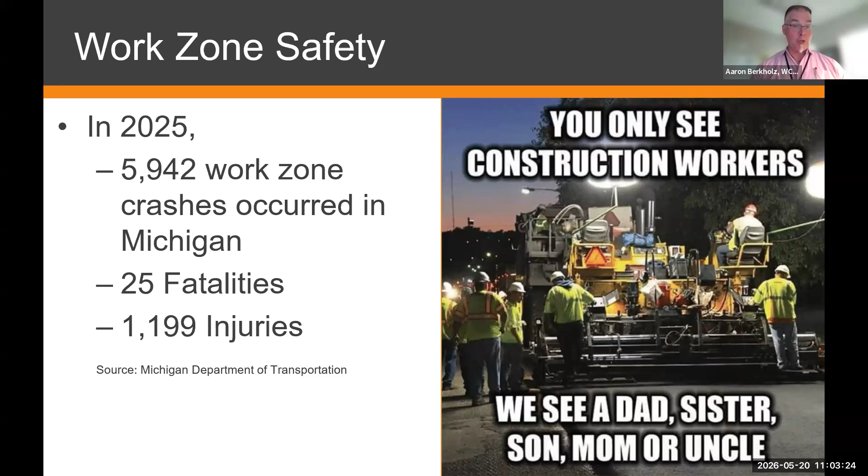Next slide. Here we've highlighted one of the road commission employees that I'm very blessed to work with. I would be heartbroken if anyone here, one of my colleagues, would be injured or, heaven forbid, killed while out in the line of duty performing their daily work.

I myself drive through work zones, not just during my daily work, but also in my personal travels. It can be quite frustrating when you're in a hurry to get somewhere, but we ask that everyone slow down and minimize all those distractions that we all have in our vehicles now.

Not only do we have smartphones now, but they're putting screens in the vehicles. So we ask that those distractions be set aside, that everyone employ some patience and remain calm, because for the most part, these construction projects are a relative short-term inconvenience for a long-term improvement. We appreciate everyone being attentive to work zone safety.

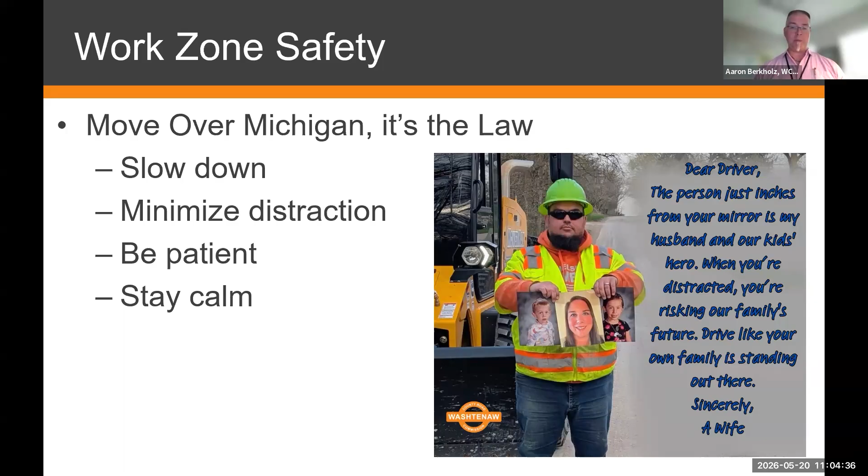Okay, thanks, Aaron. Yeah, and thanks again for meeting with us virtually. So first, we'll get started as we talk about our construction kickoff. A little bit about ourselves: we're responsible for over...

1,650 miles of county road. Over 700 miles of that are unpaved. We also manage 126 bridges and over 2,900 culverts, as well as over 36,000 signs throughout the county.

We're a contract agency for MDOT, so we maintain almost 600 miles of MDOT route. You can tell that's an MDOT route versus our jurisdiction because every numbered road within the county is under MDOT's jurisdiction, such as US 23, I-94, M14, or M17. Some of these have local names, like US 12 has Michigan Ave, or M17 has Washtenaw Ave.

So now we'll go into how projects are selected. We always like to start this way. You can go to the next slide, Tiffany.

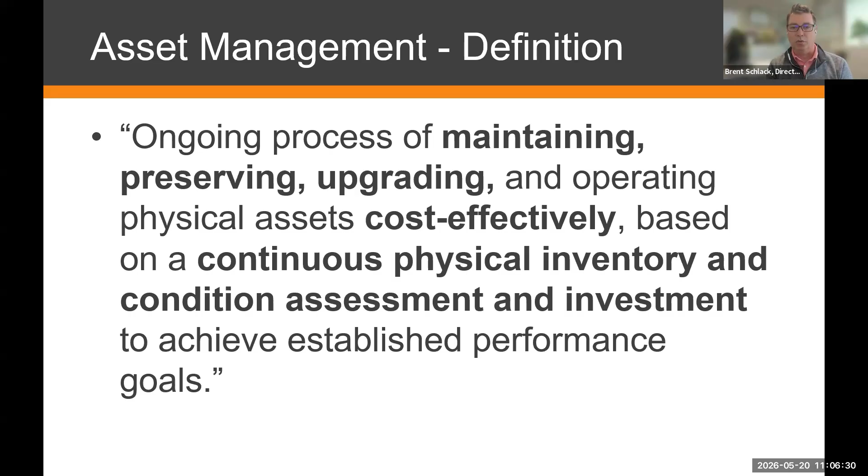We always like to start with a definition. We follow asset management practices here in Washtenaw County, which is the ongoing process of maintaining, preserving, upgrading, and operating physical assets cost effectively based on a continuous physical inventory and condition assessment and investment to achieve established performance goals. That's a mouthful.

But basically what we do is we rate all of our primary road system on an annual basis and our local paved road system every other year. So our strategy focuses on preventative maintenance, using that rating system to find the right fix at the right time in the right place. Our goal is to extend the service life of all of our roadways.

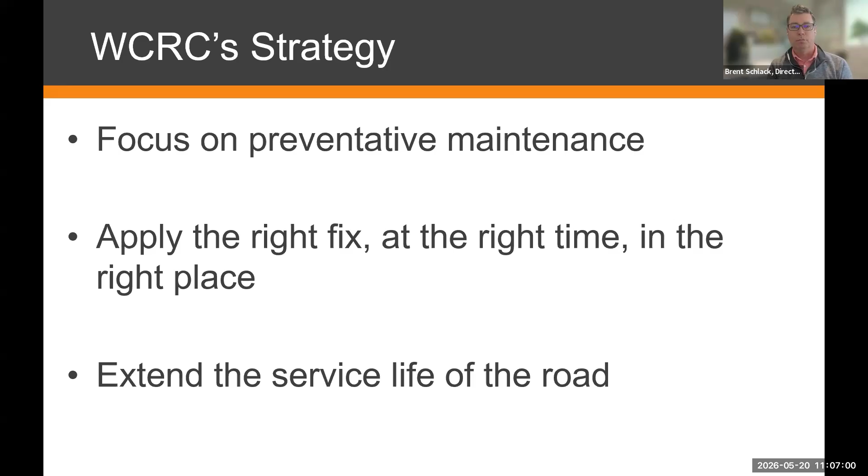We always like to use the example of maintaining your vehicle. If you regularly change the oil, that helps extend the service life of that engine, or if you rotate your tires, it extends the service life of those tires. Same thing applies to our roadway system. If we apply preventative maintenance strategies to our roadways, it extends the service life. So whenever we're looking at a chip seal road, performing crack seal, or a mill and overlay, we're using those preventative maintenance strategies to extend that service life.

So now I'll turn it back over to Aaron, and he can go through our projects.

Thanks, Brent. We've got a wide variety of project scopes that we're going to undertake for this construction season. Some construction has already started. An example would be we've been working with a contractor on the construction of a roundabout in Ypsilanti Township at the intersection of Whittaker Road and Martz Road. That actually started in the middle of March, and that's the exception and not the rule.

Generally, road construction isn't going to start until a little bit later than that, mid-April. But the contractor was very much driven to want to get started on that project, and we were not going to prevent that. We appreciated that they wanted to get started, and we're actually getting closer to wrapping that up. So that's one project that has already started.

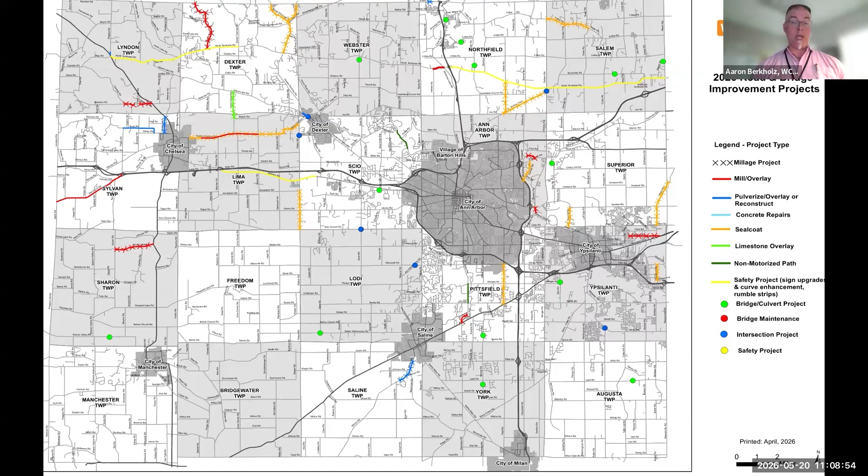We've already started some asphalt paving work up in Dexter Township on Hankerd Road. That work is ongoing, and the construction season has started with a bang. That will continue to ramp up.

We undertake a variety of types of construction during the season. Generally, that season runs from the middle of April, depending on how the spring is, through the end of October or maybe the middle of November. And then we start to run out of weather.

So we undertake preservation, which would be more in line with our annual chip seal or seal coat program. We undertake resurfacing, asphalt resurfacing, where we go out and mill and resurface our asphalt roads. We also resurface unpaved roads, and Adam's going to talk about that later. We get into reconstruction, where we do a full reconstruction of a road, and that's where we can crush the road up, providing a modified base material for new asphalt to be placed on, or it can be an even larger scope where we completely start over on a road.

We're certainly working on some bridges this year. Brent mentioned earlier the number of bridges we have countywide and the number of culverts. And then we undertake safety projects, things like roundabouts, signalizing intersections, those fall into that safety category. Also constructing centerline corrugations along roads to promote safety and reduce lane departures, because that's a reason we have very serious crashes, when a motorist leaves their assigned lane.

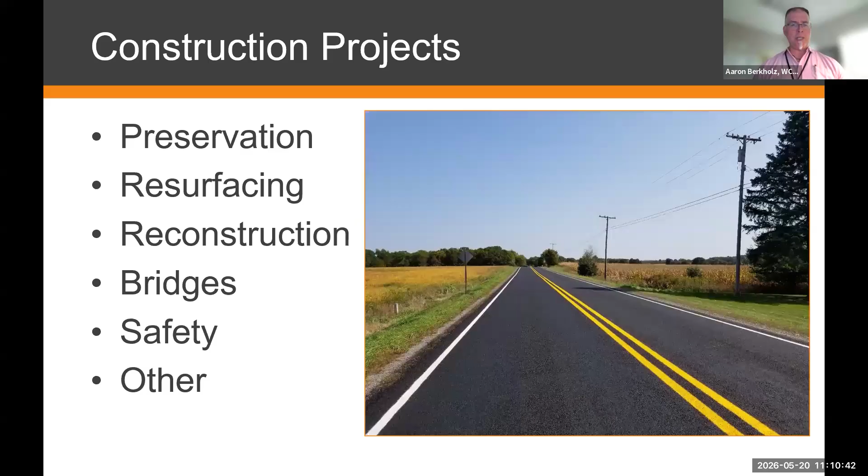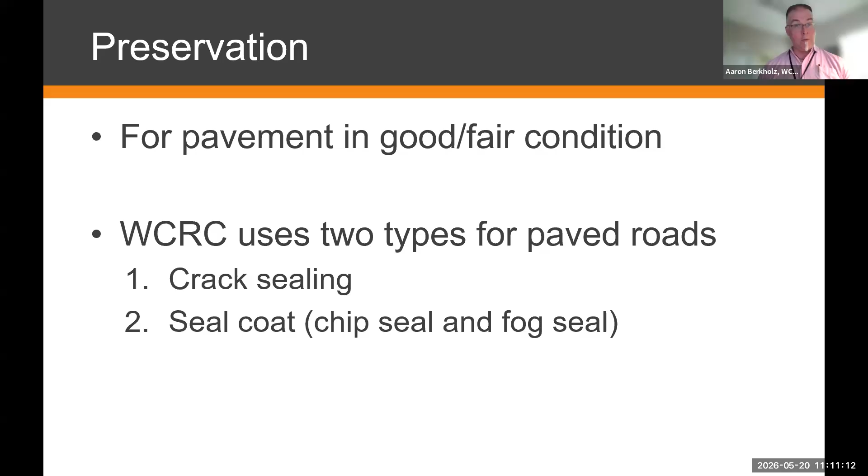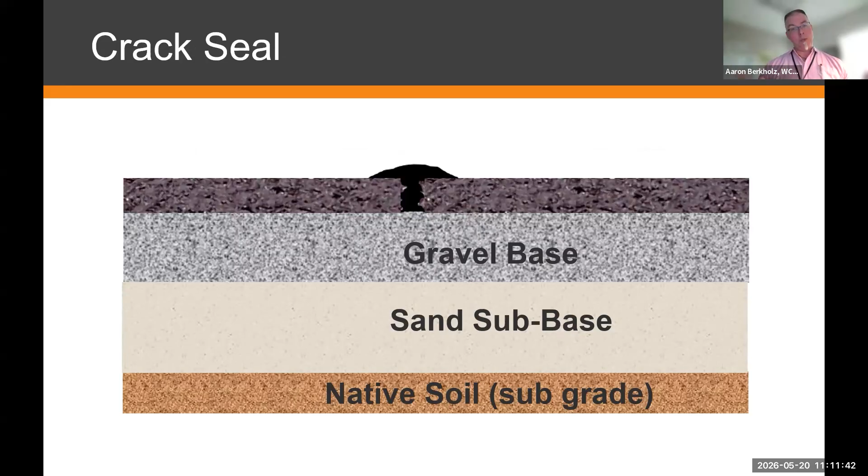You can see that you've got a crack in that asphalt surface, that top surface there. By sealing that crack, we keep water from infiltrating into those underlying layers of the road, because particularly with asphalt pavement, it's a flexible pavement. When water infiltrates that, it can have some pretty severe consequences, and ultimately, that's where our potholes come from.

This is an example of our seal coat. We undertake a robust program each year, credit to our operations department, because we actually perform this work directly. We apply what's called an emulsion, commonly referred to as tar and stone, where the adhesive, a black liquid, is applied to the surface of the road, and then small stones are put down on top of that.

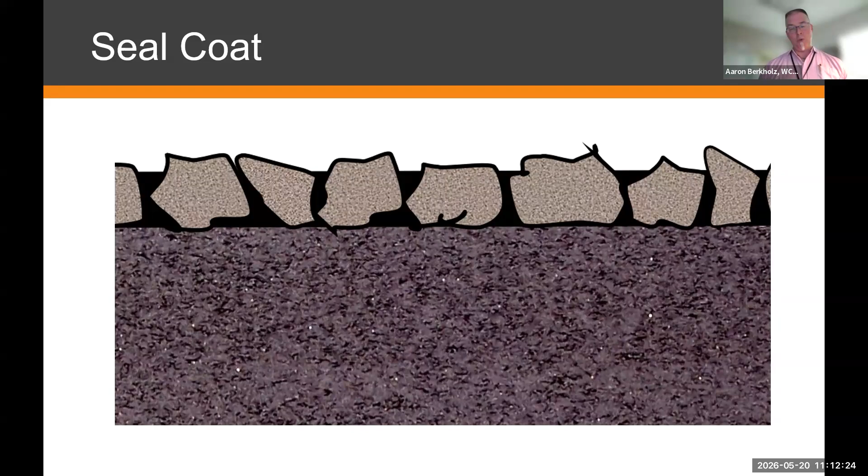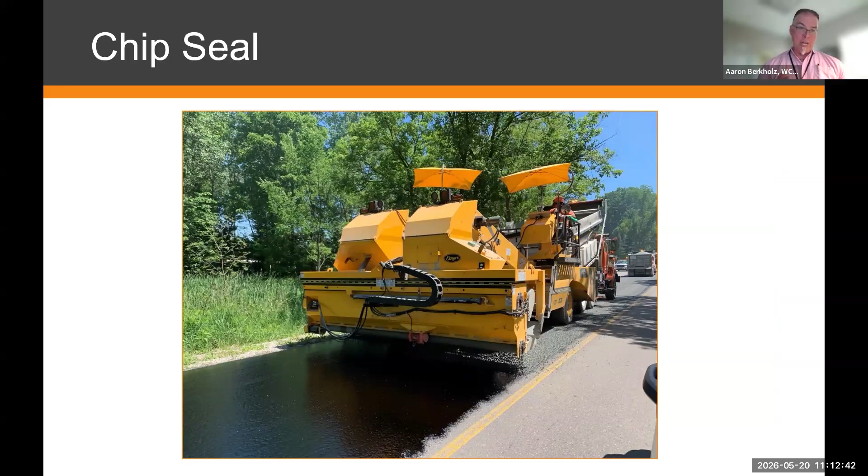That's the seal coat. Next, this is an example of that chip seal process, with the road commission performing this with direct force. We've got the truck - you can see it's actually going backwards, which is kind of a neat aspect of chip seal. We have a tanker go through that applies the black liquid, and then the chip spreader comes behind the tanker and puts the stones down. Then we roll those stones into place to really get good adherence between the small stones and the emulsion applied to the road.

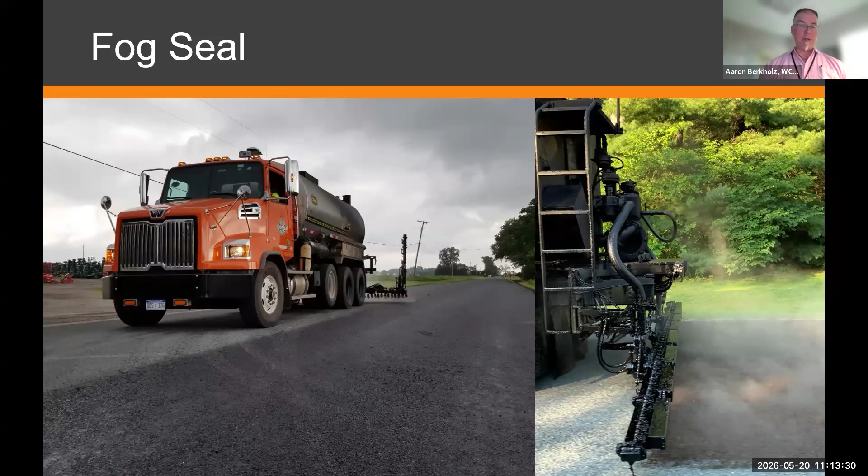What that does is like applying sunscreen to your skin. It protects that asphalt from deterioration due to ultraviolet effects, and it also seals small cracks in that asphalt surface. So again, we're trying to extend and promote the longevity of that good or fair asphalt surface.

It's important that when we are out doing chip seal and fog seal, that you follow the directions given by the flaggers on site. We oftentimes will employ a pilot car so people know what route to take. We try to maintain traffic when chip sealing a road, but it's very important that people follow the directions given, including a pilot car, so they promote their safety, the safety of the workers, and avoid damage to their vehicles.

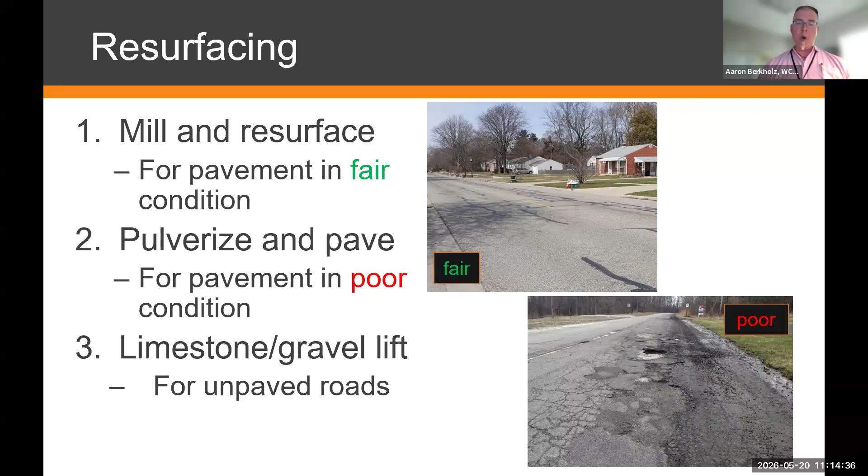The next type of construction project we typically undertake on our county roads would be resurfacing. Depending on the condition of the paved county road, we will perform a mill and resurface - that's for pavement in fair condition. As the road continues to deteriorate into poor condition, we look more at a pulverize and pave, where we're crushing that existing road and blending that crushed asphalt material with the underlying material to provide a modified base that we then overlay.

This is an example of an asphalt overlay, a mill and fill - you can see the milled surface in the foreground, and the asphalt paving in the background. That's where you remove about 2 inches of the asphalt surface, for a road that's in fair condition. I know that road was in fair condition because you can see that milled surface has got a couple of cracks in it, but overall it's in very good condition.

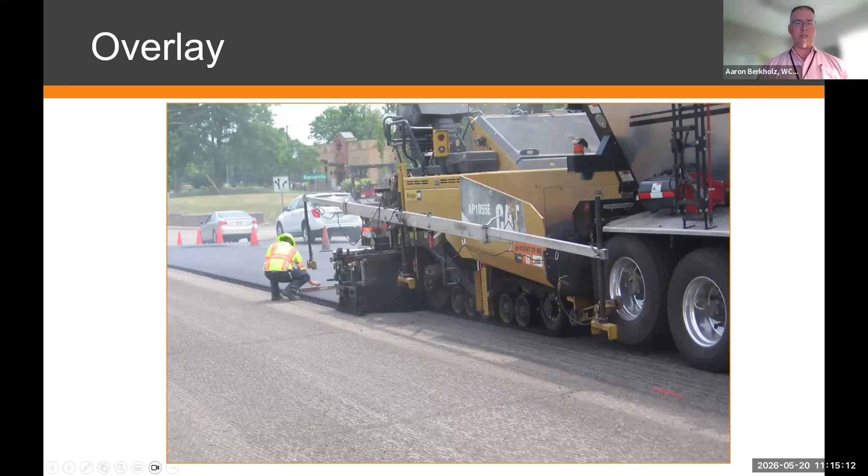For our unpaved roads - as many of you probably know, we have many hundreds of miles of unpaved county road here in Washtenaw County, and that can be a challenge to maintain and improve. But the way we improve them is by improving the drainage, which is crucial to promoting the longevity of roads, particularly unpaved ones. We put down aggregate resurfacing - in some parts of the county we use limestone material, and in other parts more of a gravel material. We refer to that commonly as a limestone lift or a gravel lift, where you're putting down new material so we can effectively maintain it.

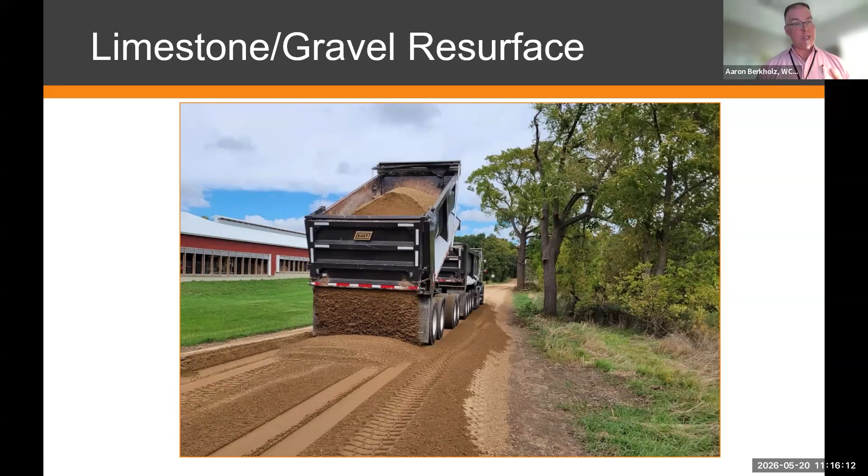We try to refer to them as unpaved roads and not dirt roads, because once a road degrades to the point where it's a dirt road, it's very difficult to maintain. You can't maintain dirt.

You have to have good aggregate, good limestone, or good gravel to effectively maintain that unpaved road.

For this upcoming season, it's quite a robust program. We are going to asphalt resurface nearly 20 miles of road this year. We currently have about 1.5 miles of unpaved road improvements, resurfacing those unpaved roads with limestone and gravel, and then we're going to do 26 miles of chip seal, which I talked about earlier.

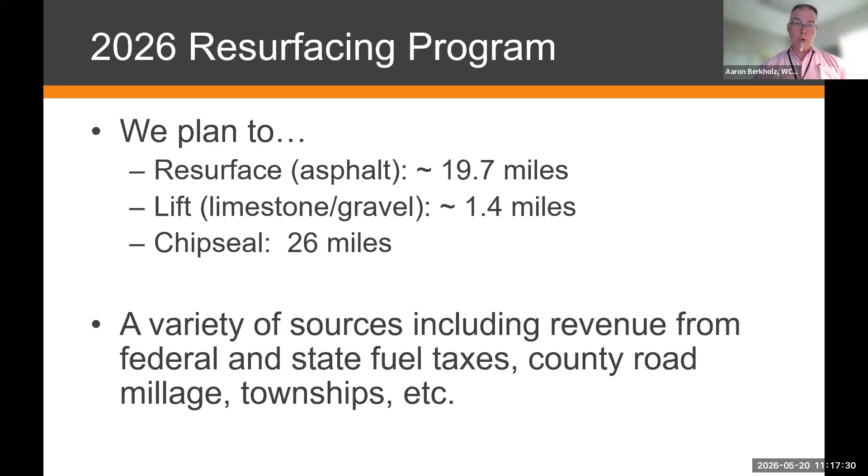The way that we budget for this is through a variety of sources, including federal and state fuel taxes, our countywide road millage, which we're so thankful to the voters of Washtenaw County for continuing to support to help us improve and maintain our roads, and the townships. The townships are a great partner with us. We offer an annual matching program to each of our 20 townships, and their partnership is essential for us to be able to improve and maintain our local county roads.

So getting into some of the specifics, these are our asphalt resurfacing projects. You can see the list here. I'll just go through quickly.

8 Mile Road up near Whitmore Lake, that one is the border between Washtenaw County, that's Northfield Township, and Livingston County to the north. We've partnered with Livingston County because they intended to work on their portion of 8 Mile Road as well as us, so we're collaborating with them, and we're going to work on that portion west of US 23 that's in quite an advanced state of deterioration, going west of Lemon Road.

We've also got Bush Road in Sylvan Township. That one is still part of a road improvement agreement with Consumers. You may recall Consumers did a pipeline project a couple of years ago. As part of the road impacts that they had, we were able to reach an agreement with them, and they've funded various improvements, including Bush Road in Sylvan Township. That'll be a pulverize and pave.

We've got Dixboro Road. This one is quite a challenge because of the nature of this intersection, Dixboro at Geddes in Ann Arbor Township. The mill and resurface is going to extend from the big bridge that goes over the Huron River south of Geddes Road, and it's going to extend up to and through the intersection at Geddes and Dixboro. Again, it's multiple lanes, a lot of traffic, so that one's going to be a real challenge based on the number of lanes and the traffic, but we're going to resurface that because it really needs it.

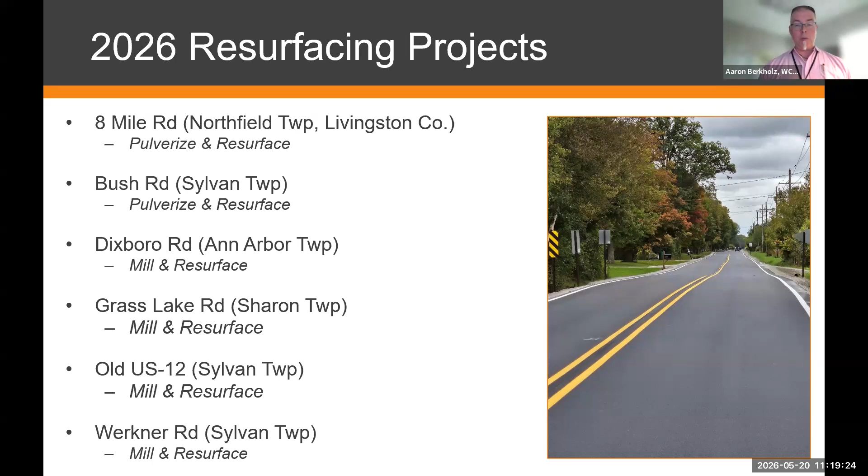We're also going to work on Grass Lake Road. We're going to work on Old US 12 out in Sylvan Township. We're going to be working on Werkner Road in Sylvan Township.

We're going to be in Holmes Road in Ypsilanti Township, that's a mill and resurface between Ford Boulevard and Michigan Avenue. We're going to work on Macon Road, that's another crush and shape.

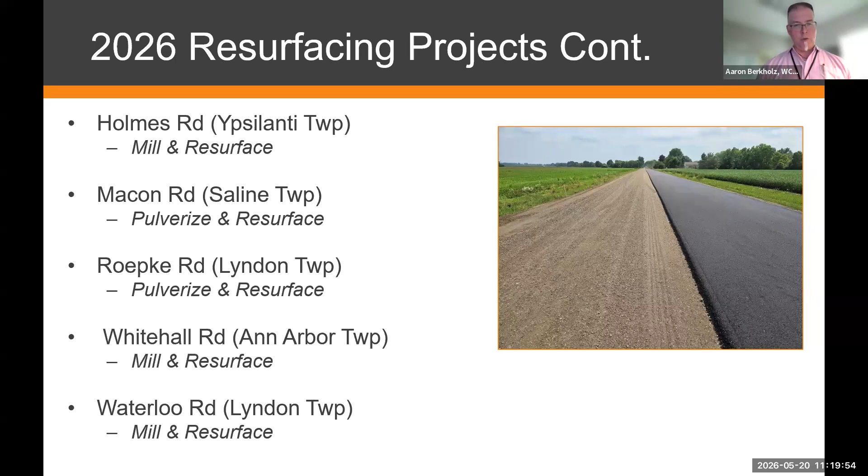We're going to work on Roepke Road in Lyndon Township. We're going to work on Whitehall Road, again near Father Gabriel Richard High School in Ann Arbor Township, doing a mill and resurface there. And then Waterloo Road in Lyndon Township, we've got some mill and resurface work to do there.

Cherry Hill Road. So we talked a little bit about bridges. Brent noted that we've got 126 bridges countywide that the Washtenaw County Road Commission is responsible for, that we own. One of them is Cherry Hill Road.

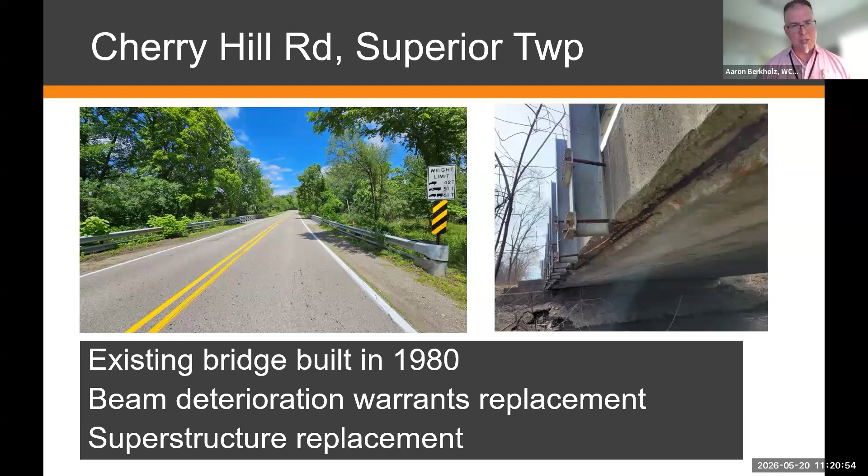The contractor started this work last week. They had to close the road to do it. This is in proximity to the hamlet of Dixboro, or the Huron Valley Humane Society over in Superior Township. So that road will be closed. It is closed, and it'll remain closed until the work is complete.

We've also got Main Street in Whitmore Lake. We have to specify which Main Street, because there's Main Street in Dexter, and there's also Main Street in Whitmore Lake.

Up in Whitmore Lake, the existing bridge—it's a bit of a dated reference—is just north of the old Whitmore Lake High School. That shows my age, since the new Whitmore Lake High School has been out on Whitmore Lake Road for a while now. But that gives a sense of where this bridge is located.

The existing bridge owes nothing to any of us. It was built in 1920 and is basically at the end of its service life. So this will be a full bridge replacement, expected to close in late June, with work continuing thereafter. It's quite an extensive job because we're replacing the bridge in its entirety there on Main Street.

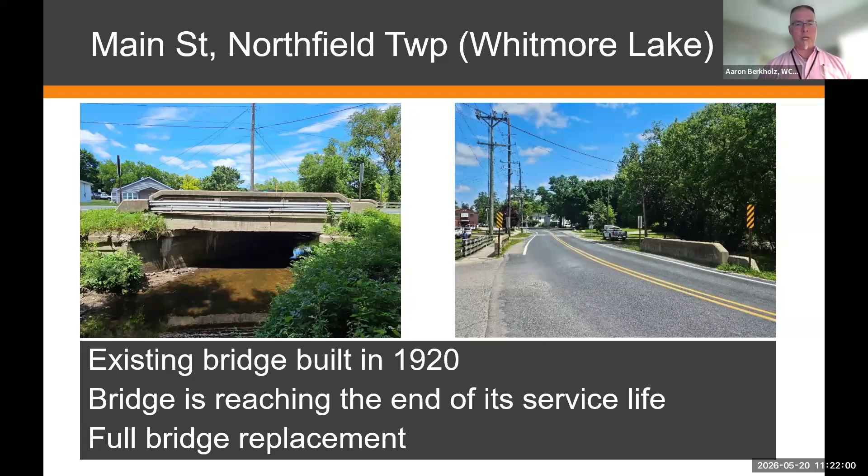Sharon Valley Road is our third bridge project for this year, down in Manchester Township, on an unpaved local county road. The existing bridge was built in 1960. It suffers from deterioration—it's in poor structural condition, has a 20-ton weight limit, and is also functionally obsolete. The alignment of this road is very poor. As a vehicle approaches from either direction, that motorist or piece of farm equipment has to navigate some very tight turns, and there's a lot of vertical grade change, since it's at the bottom of two significant hills, because that's where the River Raisin is.

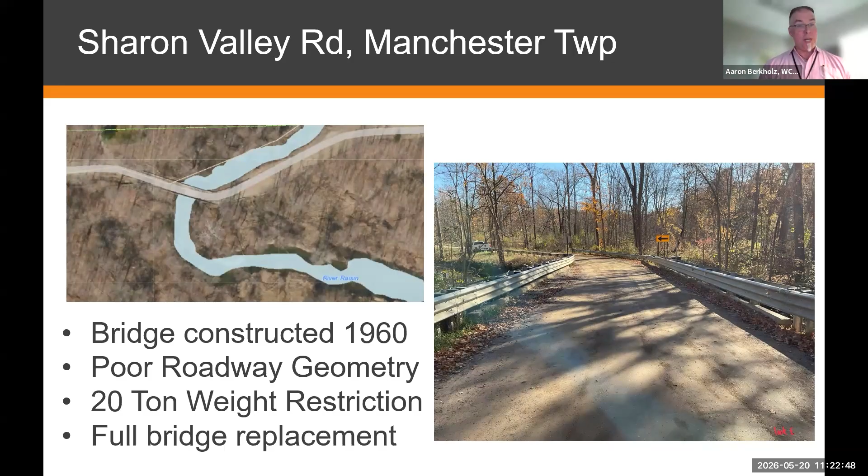All three of the bridges I've discussed include federal aid funds, so their design has to meet federal and state design requirements. Part of that is building a bridge of sufficient span to promote good movement of the stream through it—we call that hydraulic design. We also have to provide an improved alignment for the motorists navigating that area.

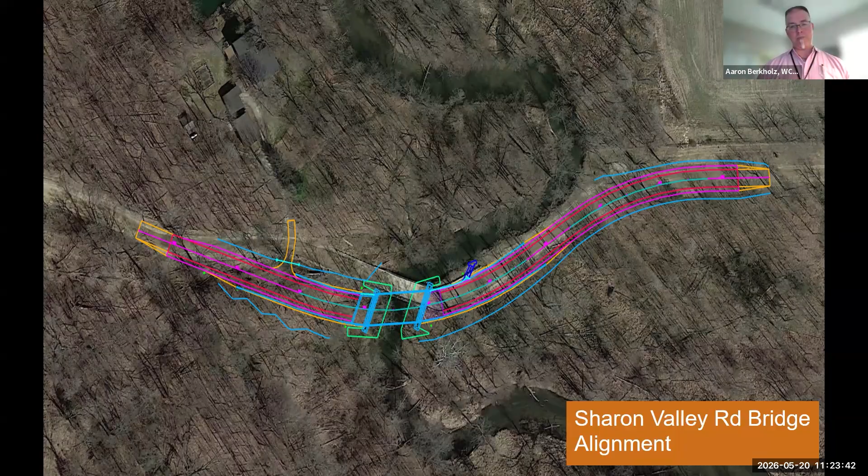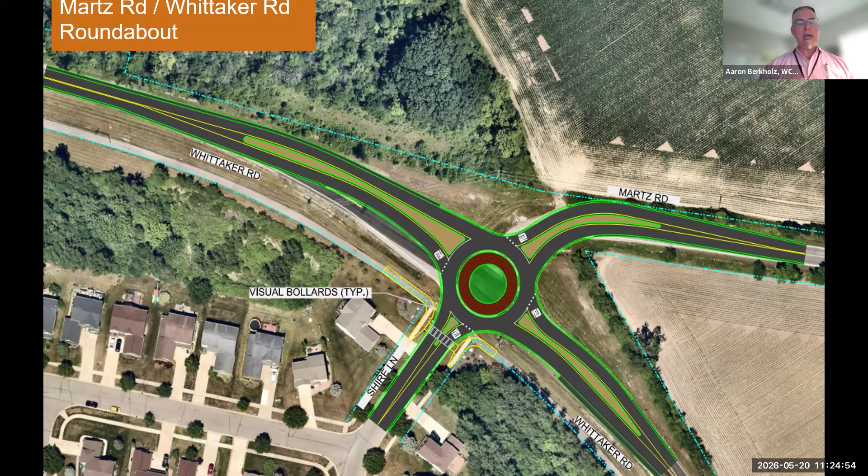It also improves safety. We talk about safety a lot with roundabouts, because one of the most severe crashes we have countywide is a T-bone crash at a traditional four-way stop intersection—somebody runs a stop sign or a red light and broadsides a vehicle coming through. Roundabouts really take that away, because everyone enters at a slower rate of speed, and there's no center of the intersection for traffic to collide in. Everyone is going around the circle at an angle.

Next slide. Here's one of our other roundabouts. This construction has already started as well—it started earlier this month, back in early May.

This has a significant traffic impact, and we did not overlook that in deciding to pursue this project and close the road to do so. This is at the intersection of Dexter-Chelsea Road and Main Street, just outside the limits of the city of Dexter, and we collaborated with the city of Dexter on this overall project.

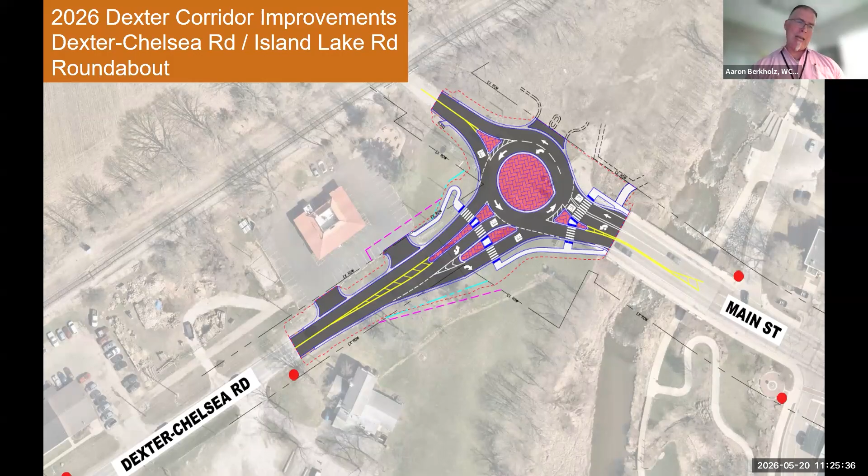The roundabout is kind of the highlight of the project, but overall it includes other aspects. Here we've got the roundabout, and further west at the intersection of Island Lake and Dexter-Pinckney Road, we're not building a roundabout, but making an improvement to add a right turn pocket for traffic coming away from the city, heading westbound, because we get really heavy afternoon traffic from people traveling through Dexter and out towards Pinckney. There's currently no dedicated right turn pocket there.

Motorists have essentially created their own type of right turn pocket by driving on the shoulder to get around stopped traffic going through the intersection on Island Lake Road. So we're going to include that right turn pocket and put up a new signal, which will improve the efficiency and movement of traffic at this intersection. Next slide.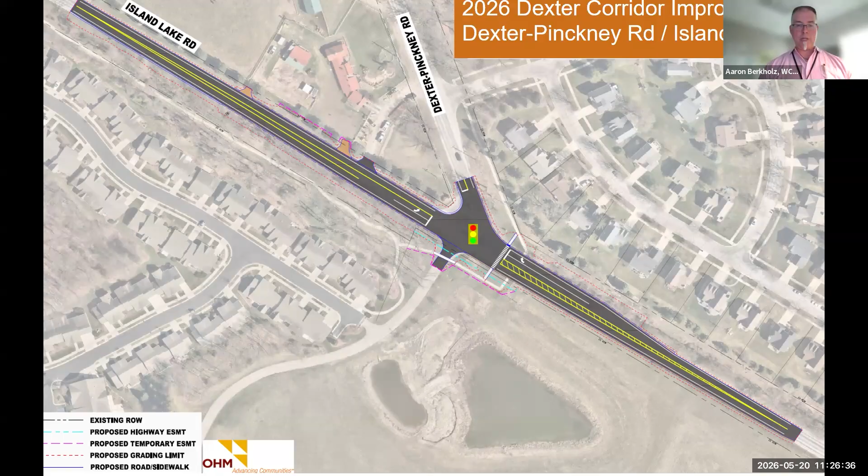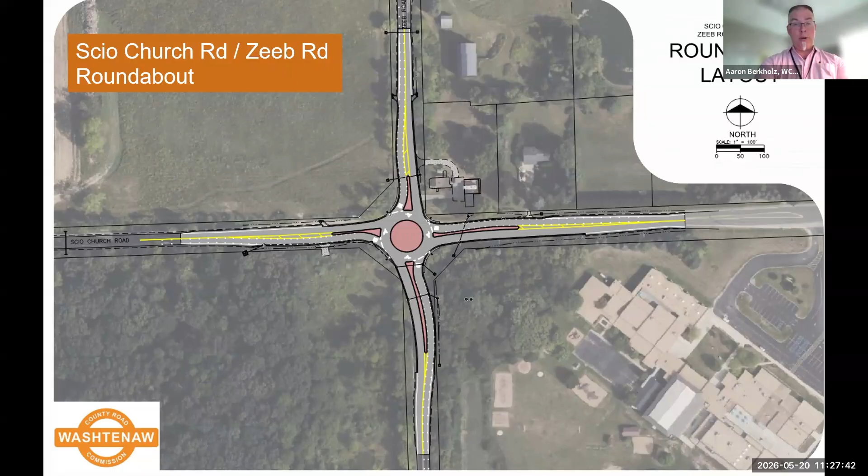The work is expected to start in the middle of June and be completed before school goes back. You can see Emerson School there in the lower right-hand corner of that picture. Again, we've been in contact with Emerson School, and so with the proximity of this project to the school, being immediately proximity-wise, we have worked around the school year to try to get this roundabout construction completed when the kids are out for summer.

Next slide. And here's the 4th of the roundabouts. This one is up in Salem and Northfield Township, up in the northeast corner of the county. And this is at Dixboro Road and Pontiac Trail. We have another roundabout just up the street from here at North Territorial and Pontiac Trail. We built that a few years ago.

This intersection, again, what's going to be of great benefit here is efficiently moving traffic. There's a great movement of traffic during the AM and the PM, those peak hours when people are going to and from work. In particular, people that live up in the South Lyon area but work in Ann Arbor utilize Pontiac Trail. So we see some really high volumes during those peak hours.

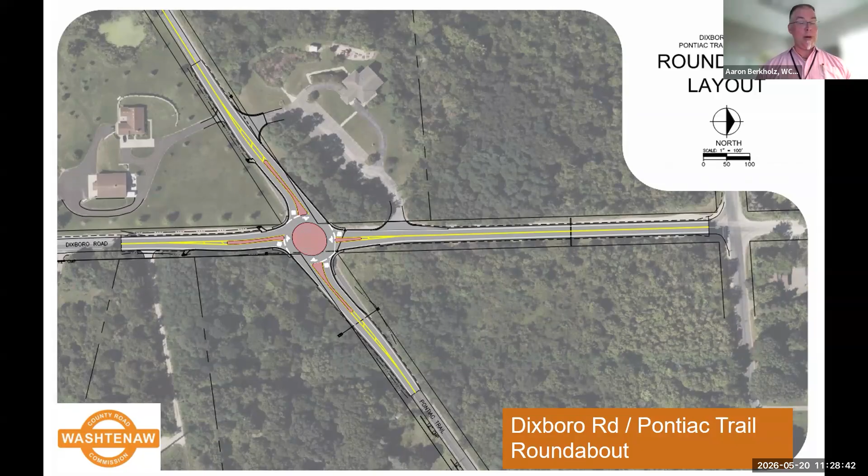And again, a roundabout promotes that continuous movement of traffic. You can really get a lot of traffic through a roundabout without people having to stop. Next slide.

So the road commission, I talked about bridges, and Brent touched on this earlier. We have an abundance of culverts. We own more than 2,900 culverts throughout the county. These are not bridges. Basically, the way that we differentiate between a bridge and a culvert is the size of the structure. So a lot of culverts are round structures, pipes that go under the road, similar to a bridge. And the idea is they're conveying either a stream or stormwater.

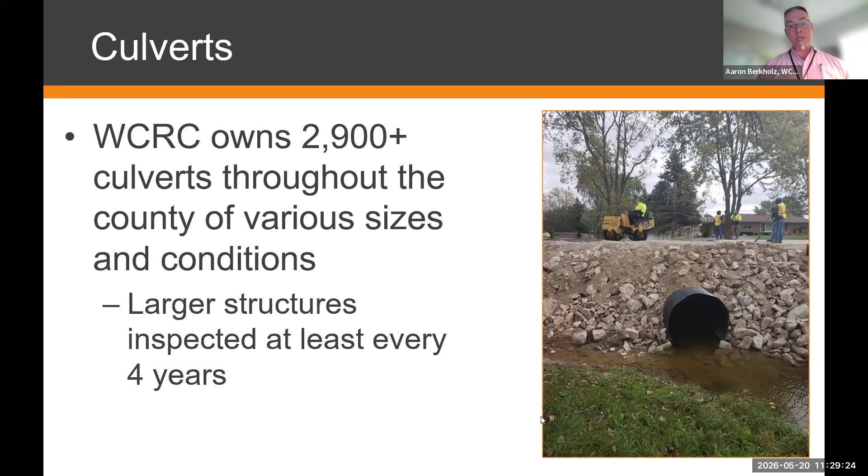And so we have a number of these that need to be replaced. We do have an annual program to inspect not only our bridges, but we also inspect our culverts on an ongoing basis. And here's an extensive list of culverts.

I do want to note here that what's been of great help in us replacing local county road culverts, and all the roads listed here are local county roads, has been the great partnership we've had with our townships and with the Water Resources Commission. Water Resources has administered a program called the Stormwater Grant Program, and so the townships have been able to realize an outside source of funding to help them partner with us to replace these types of structures.

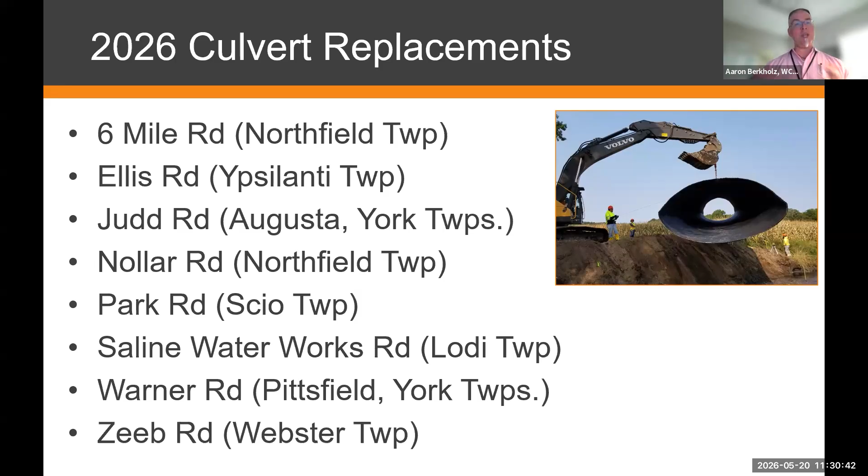And these structures get quite large. Even though they're not bridges, they still can be in the realm of, I'll say, 10 to 15 and almost up to 20 feet. So again, a great partnership with the townships and with the Water Resources Commission to realize all the work that's listed here. One thing with culverts is we close the road. When we do the work on a culvert, we close the road. That promotes the efficiency of the work and also everyone's safety, the safety of the motorist and the safety of the crew out there doing the culvert replacement.

Now we'll talk a little bit about traffic and safety. And again, within the engineering department here at the Road Commission, we have 3 sections: the permits section, the construction and design section, and the traffic and safety section. And so one of the aspects of our work that the traffic and safety section oversees is our traffic signals.

This would be new signals, upgraded signals, and flashing beacons. Flashing beacons are the light that hangs over an intersection. Sometimes it's a 2-way stop control, sometimes it's a 4-way stop control, but it's that blinking light that technically is called a flashing beacon.

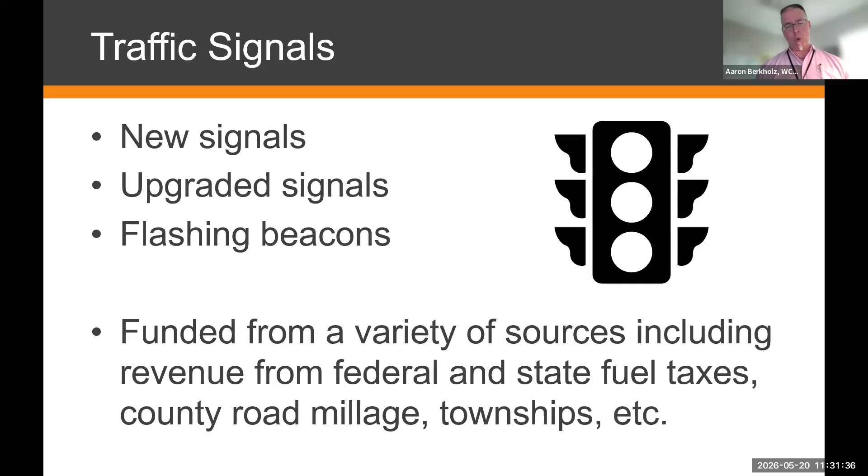The signal work that we perform is funded from a variety of sources. We have federal and state fuel taxes that come into the Road Commission, and we have our Michigan transportation funds, the largest part of our budget here at the Road Commission, that are dedicated sometimes to signal projects.

We've already started some signal upgrades. At the top of this list, Parker Road and Shield Road, just up the street from Dexter High School, that traffic signal work is now complete. The contractor started the work very early in the season, actually during the winter, and we were able to complete that. We're also making a variety of other improvements that are listed here.

Oftentimes the improvements we're making at a traffic signal may not be like replacing the traffic signal or putting up a new one. It's improving the communication and coordination between signals, because as we improve that communication and technology, it promotes the efficient movement of traffic. An example would be corridors with several signals, like the Carpenter Road corridor in Pittsfield Township, or Huron Road in Ypsilanti Township, where you've got several signals south of I-94. As we upgrade the communications between those signals, we're able to better promote the flow of traffic through that corridor.

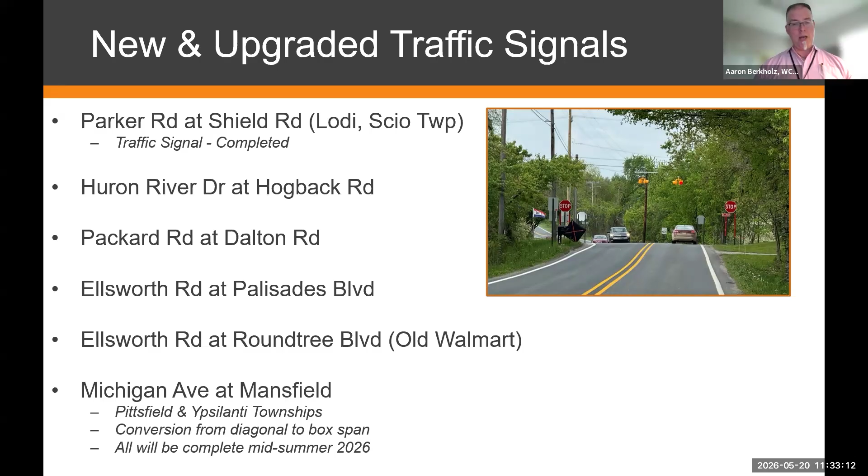One intersection we'll highlight is Pleasant Lake Road at Zeeb Road in Lodi Township. This has always been, in my time, a 2-way stop control, with Zeeb Road north and south of Pleasant Lake stopping, but Pleasant Lake Road being the through road with no stop control. This has now changed as of this morning. Our crews were out there, and we now have set this up as a 4-way stop control intersection.

What brings about that change is we talk about warrants. Warrants are basically a data-driven process that guides us in making decisions where we should change the function of an intersection, for instance, and that's what drove this decision to change this from a 2-way stop to a 4-way stop. Things you look at when examining those signal or stop control warrants include whether there's a history of crashes, what the traffic volumes are on the intersecting roads, and things like turning movements - which direction the cars are going in.

So again, want to highlight that intersection has changed significantly, and we have a lot of reminders out there at Zeeb and Pleasant Lake as motorists are approaching, to drive home the point that this is now a 4-way stop controlled intersection.

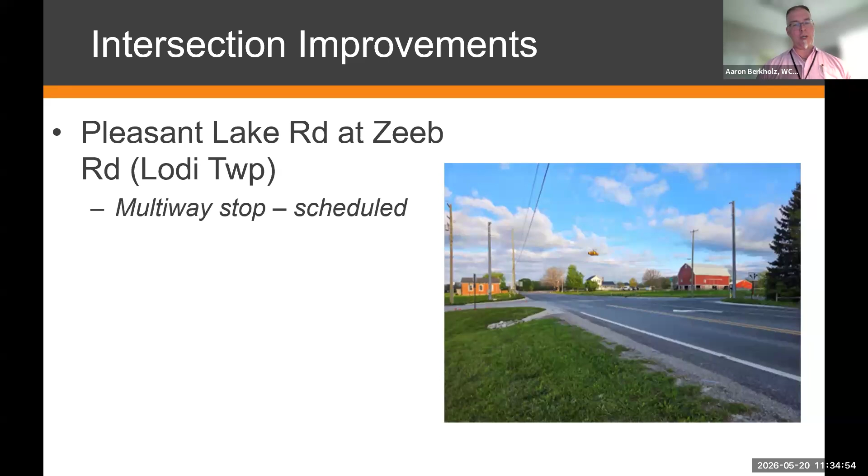We are continually monitoring the roadway for potential safety improvements, and we receive information through a variety of sources. It's not only what we observe out there, it's what our township partners observe, it's what law enforcement observes. We take input from the motoring public themselves - our constituents provide input so that we can monitor, in particular, certain intersections where we're receiving reports from a variety of sources that we need to look more closely at.

We look at treatments like adding center left turn lanes. Center left turn lanes remove a turning vehicle from the flow of traffic. So if we see a prevalence for rear end crashes at an intersection because of people making a left hand turn and vehicles coming up behind them and not stopping, we look at potentially adding a center left turn lane.

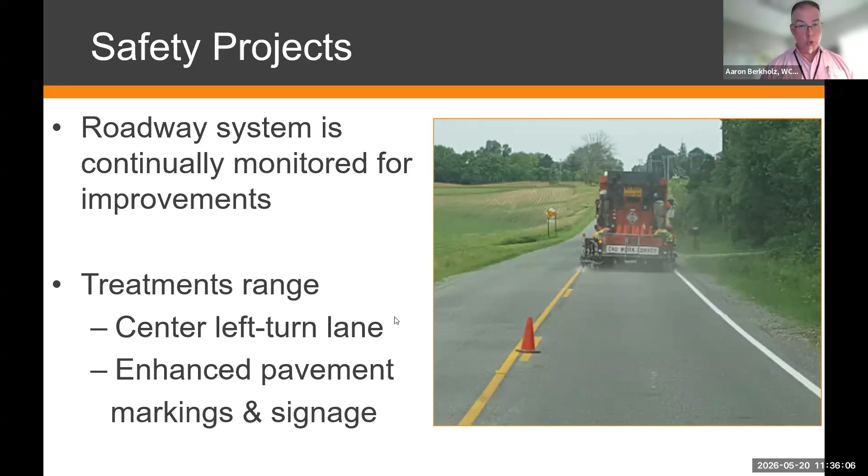And then we undertake enhanced pavement markings and signage. Pavement markings and signage play a huge role in promoting safety. For anyone that's ever driven down an unpaved road, or a paved road that hasn't yet been marked with pavement markings, that really speaks to how important pavement markings are.

And we have a robust program every year. Just on the county road side of things, we have over 6 million feet of long line pavement markings. What we refer to as long line would be, in this picture, the white edge line, the lane lines which we call skips, and the center line you can see adjacent to the paint truck there, the yellow line.

So just those lines, we have 6 million feet countywide that need to be maintained. We also have special markings like stop bars, turn arrows, crosswalks. The green paint is actually a marking we've used in some areas of the county to delineate a bike lane, like near the interchange at Ann Arbor Saline Road and I-94, which has the green EnduraBlend paint. That's to draw attention for motorists that it's a bike lane.

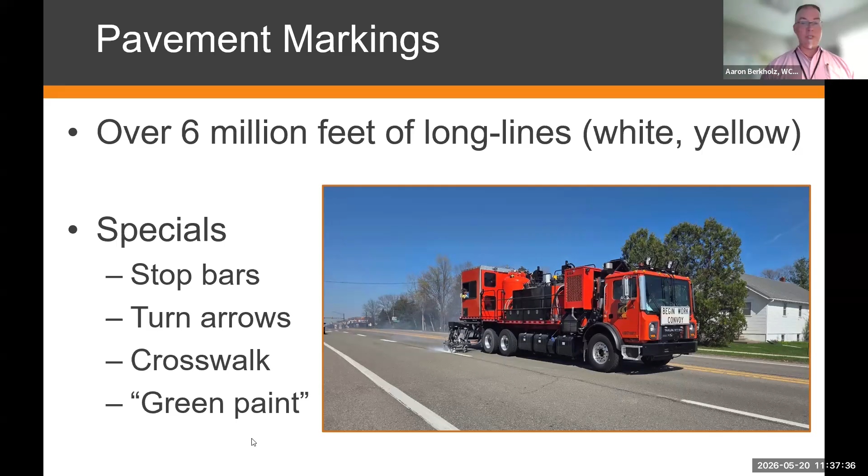By the nature of the work we do and the weather here in Michigan, we are continually wearing out the pavement markings on our roads. So this is an ongoing program. Every year we have to invest heavily to keep those pavement markings up.

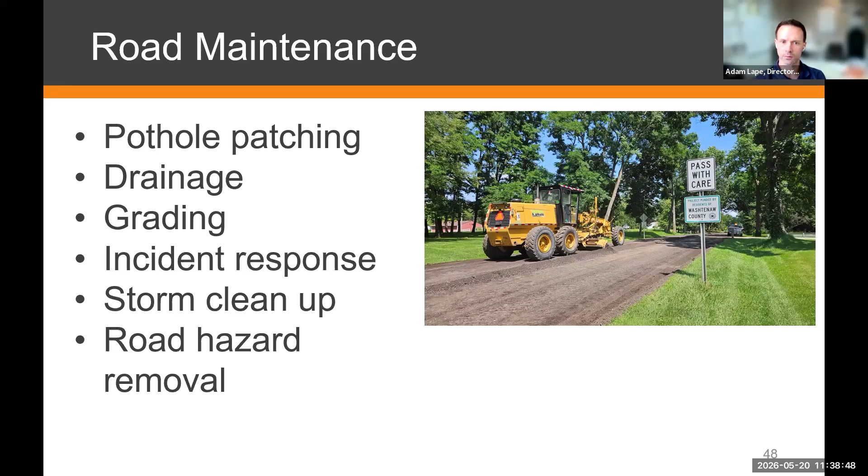The same thing goes for our grading in the unpaved road segments we're discussing. We try to crown that road as well, using motor graders to essentially build a crown in the road, just the same way we would pave it into the road during a normal paving project, to try to get that water off the road and move it along.

So through incident response, we also work ourselves into the seasonal scheduled maintenance pulled up on the screen here. Dust control itself is very important to the unpaved road segments, which most of you are probably familiar with at some point throughout the county. Nearly 800 miles of unpaved roads, so it's very important for us to suppress that dust as best we can. That's typically in the summer months.

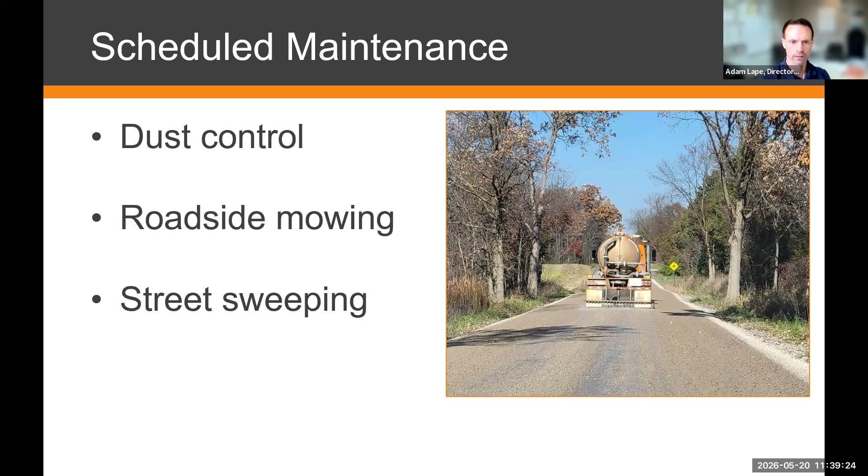Once the roads have stabilized throughout the spring, we start that dust control program. Then for the schedule itself for roadside mowing and sweeping - when we talk scheduling for us, it's typically mid-April through mid-November. We really need that road to be stable and consistent, and we need the warmer temperatures for some of our materials to work. Certainly some of those things are subject to environmental restrictions.

Off-season projects you will see occasionally, but that's usually emergent response if need be. Sometimes we have to respond to things that happen outside the year. An example I used previously would be a culvert failing in the middle of the winter - our crew would perform one of those projects just to keep a road open throughout the season.

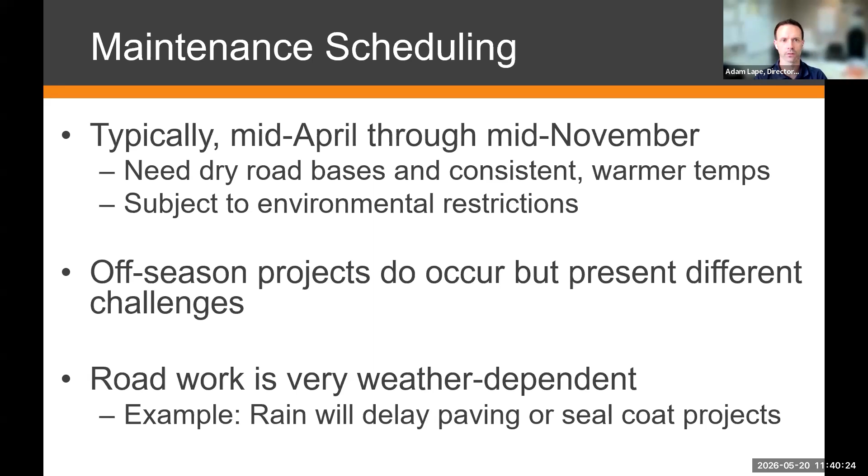Road work is certainly weather dependent, as you all know. Rain will delay paving or our seal coat projects. So it could delay engineering projects that Aaron and Brent were talking about, and it also can delay internal projects and operations here at the road commission itself. So it is complicated to schedule work, especially from the maintenance side of things.

A lot of moving parts. We have to coordinate with MDOT and potentially some of their projects that could obstruct traffic a little bit, so we try to adjust our schedule to work through the Department of Transportation as well. Environmental considerations are very big for us - we try to work our projects around environmental restrictions or environmental concerns based on the roads specific to their area, so we try to be considerate to that. Utility conflicts also come into play between engineering and our operations projects where we need utilities relocated, and essentially all that coordination is also going on with other projects as well.

So we're not closing segments that are getting worked on through a different process. Our impact to traffic is really important when the road is closed. As Aaron noted earlier, it's very important to us because we're likely working behind it, or the road itself is not navigable, so very, very important to us.

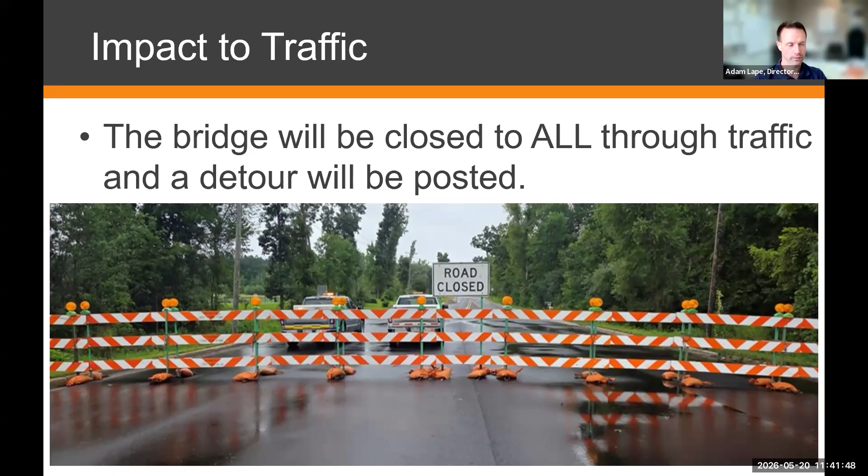Please be mindful of that and be patient with us as we try to improve these road segments. And with that being said, let's talk a little bit about the communication side of things, where Tiffany Oliphant's going to jump in here and touch base on some ways you can really connect with us.

to see some of that construction work throughout the year. Thanks, Adam, I appreciate it. I'm getting some questions in the chat, and we'll get to that in one second.

But I just want to come out of the presentation really fast and show you how to maneuver through our website, so you can find these various projects and sign up to receive updates via email, and also just look on the website. So here on our website, you go to wcroads.org.

If you go to roadwork and construction, the current projects page is a drop down there. For those who have not been on our website or haven't been to one of these meetings before, I'm going to go through a quick overview here so I can open it up for Q&A.

So here on our page, this presentation will be here once I download it. Also, if you scroll down, this map is interactive. If you click on the blue line or a red dot there, a project will come up, and you'll click on more info, and then you can get to the project page that fast.

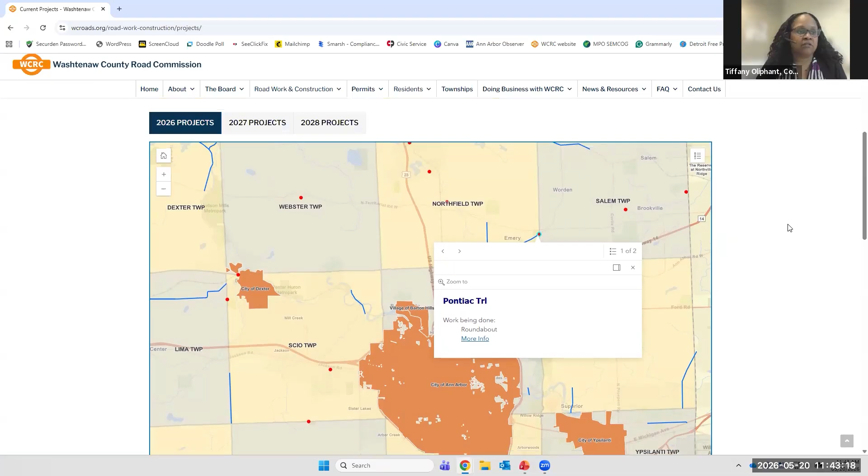We have projects out from '27 to '28, because we're not just working in '26 — our team is working all the way into '28. So if you scroll down this page, we have project cards, and there you can find information on various projects.

that the presenters talked about. One is the big one that everybody's talking about, one is the Island Lake Road, Dexter Main Street — that's how you find this project page. There you can find all the information about this project: why it's important, what's going on, the closure, the detours, all of the various presentations, the video, the slides from construction to design.

We have some information about roundabouts. You can subscribe also here on every project page. We have a subscription — you put your email address, your name, and your zip code. You can click on several different townships if you're interested in information on road work going on in that township.

Scroll down and you can get our weekly road work schedule. I'm going to show you the weekly road work schedule in one second. Click on the weekly road work schedule if you're interested in receiving that. And then here are the various projects.

Again, I told you, we're working all the way to '28, so we're populating this list for you to get information on the '28 projects. And then at the bottom, you hit subscribe. For our weekly roadwork schedule, you go back to roadwork and construction.

The weekly roadwork schedule is there. You will find all the information on your weekly roadwork schedule there. It's alphabetized if you hit the little arrows, and then you can find out about projects and the contact information there.

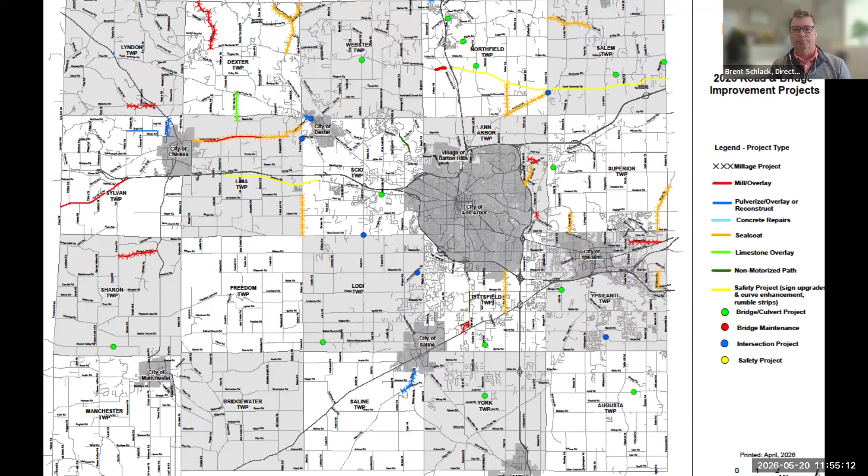Heather says, thank you for answering all the questions about the downtown Dexter construction. I did miss the info on the business owners, but I am not subscribed. She says she's going to subscribe now.

Melissa just asked, how about when they do Main Street? Melissa, Main Street is within the city of Dexter, so that would be a question for the city of Dexter about how they're going to do their construction for Main Street.

Okay, we're at 55, and I believe that those are all the questions that I have. We're about to go into chat with the Road Commission and the Managing Director.